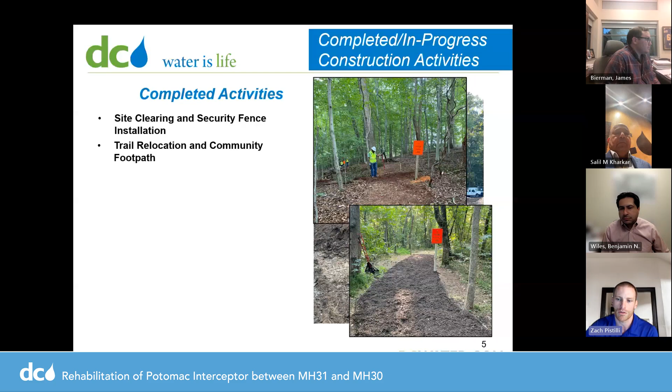Some of the completed activities to get us from the very beginning to where we are now. We had site clearing and security fence back in mid 2022, followed by the trail relocation and the community footpath that services River Park Lane all the way down to the Potomac Heritage Trail. We've had some deep excavations to install these structures. The first is this slip line structure, which is purposefully on top of the Potomac Interceptor, installing a pipeline inside the Potomac Interceptor. That stabilizes that deteriorating pipe and allows future construction to facilitate the rest of our project.

Secondly, the next deep structure was manhole 31.5, representing the far left structure that I showed you in that bird's eye view. You can see this pipe is the Potomac Interceptor. It's conveying flow actively. And we dug under the structure and then built a containment around it.

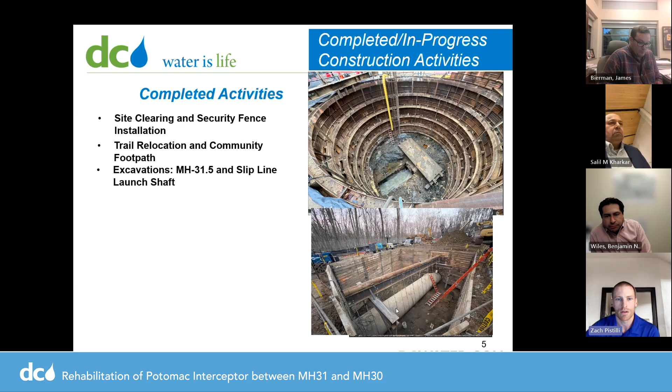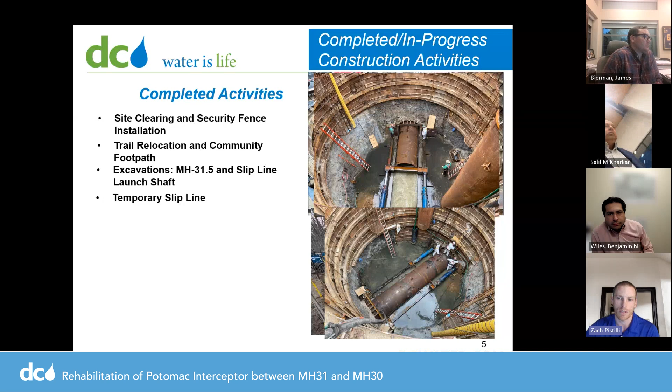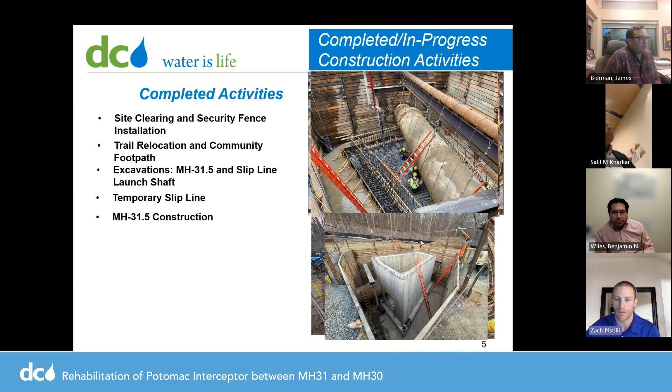This is a photo, two photos showing the actual slip line, really pushing a pipe inside of a deteriorated pipe. So now this pipe, the steel section, is in place, stabilizing that Potomac Interceptor at our project site. Here's the manhole 31.5 construction. Again, that pipe in the top is still conveying the flow, and the bottom is showing the concrete structure.

Manhole 31 is that circular structure that was in the middle of our screen. This shows a lot of the reinforcing steel and the concrete formwork. That structure has been completed as it stands right now. And then additionally, we have the interconnecting piping, the 66-inch that connects manhole 31.5 over to manhole 31. And those efforts are in progress, completed to date.

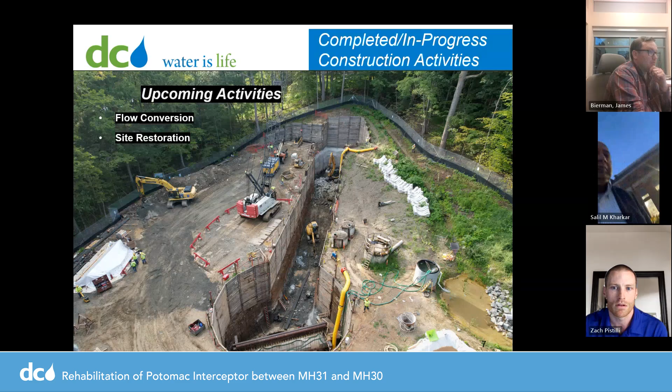Following the completion of that, we'll be converting the flow for about a 2 to 3 week period, and then coming up with backfill and really moving on to site restoration. So that's our planned activities, flow conversion and site restoration up in the future.

So getting back to the planned features of work, when we do our site restoration, it consists of a few different things. The first is going to be our commitment to restore the Potomac Heritage Trail to existing conditions. And that's really both a temporary trail that will be removed, that is routed around our project site. Many of those who use that trail are familiar with it. It is representing the top area up here. The yellow is the existing Potomac Heritage Trail, and that will be placed back into service.

Following that, we'll be restoring that towpath, removing it and regrassing as needed. And that will allow the community to still use that gravel access path that everyone was using prior to the construction site.

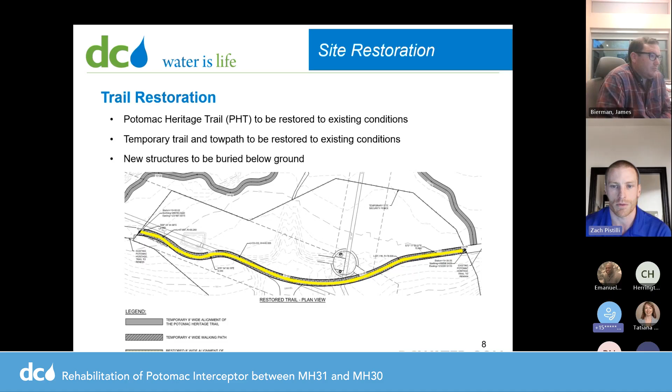Part of the reforestation, we've developed a reforestation plan that is in lockstep with the Fairfax County Public Facilities Manual and also NOVA Parks. So that's really going to consist of 200 plantings with 1.5-inch diameter trees. They're really going to be equally distributed for canopy coverage, and then additional seedlings for additional canopy as they grow up. So everything you see inside of the green here, that's our target area for reforestation.

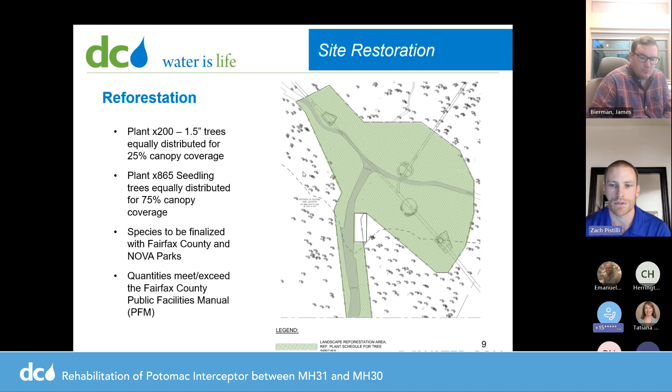Part of the project also, we've committed to do some paving restoration. The paving restoration is going to take place on the private section of River Park Lane, terminating at the entrance to the project site in that gravel path, coming up River Park Lane, bearing right along that dog leg bend, and then out to that cul-de-sac that begins the private road. So that'll be a pavement restoration.

We're still in works about the full depth of pavement repair. I think we have some samplings done, getting some data about what's the total depth of asphalt, but in kind, that's our commitment to replace that paving to the same depth as existing.

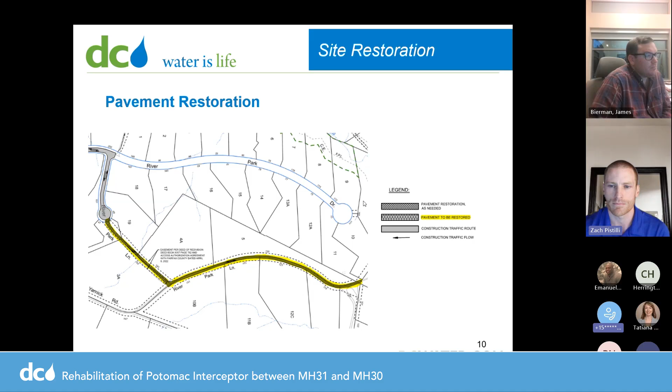So back to our emergency response. I'm sure many are curious in the call. A lot of these slides are really from our presentation we delivered back in February of this year, but I do want to revisit it as we've concluded that emergency response effort.

So luckily for us, we did identify this as a project risk early on in the design phase, and we were able to establish an emergency response plan and also a subcontractor that would be on call in the event that an emergency like this happened.

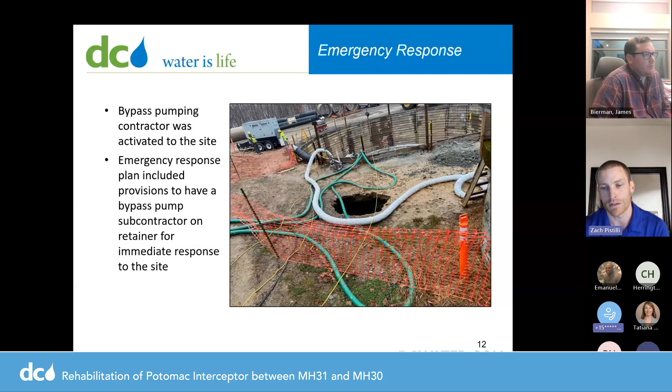So our first step was to call that bypass subcontractor, and they effectively mobilized to the project site within 24 hours, and they dropped 5 bypass pumps and 1 extra in case of maintenance or pump failure for one of the in-duty pumps. Also the discharge piping and suction piping.

This is a photo here of the discharge pipe out to the existing manhole 31. And you'll note that to convey the flow into that manhole 31, we had to remove the lid. And that allowed our piping to discharge through that structure.

While the bypass pumping was conveying the flow for about a 2 to 2.5 month period, we designed and constructed a temporary sewage line from where the bypass pumps were pulling the sewage and then to manhole 31 where it was discharging. And this is a 52-inch steel pipe section. It was about 140 foot in total length.

So we developed that, installed it, and as it stands now, this pipeline is actually conveying the flow between those two structures, and we're off bypass pumping at this point, which is great news. So once we got off bypass pumping, that really allowed us to assess what the impacts to the project and the Potomac Interceptor were as a result of that sinkhole.

So then our efforts shifted into removing that sediment so we can get back to normal flow conditions. So we did about 4 months of heavy, large diameter sewer cleaning, and there's no way to shut off the Potomac Interceptor. So we had large equipment, we had vac trucks, we had a lot of activities to remove this sediment in a deep excavation while the active flow conditions are really happening through and around the site.

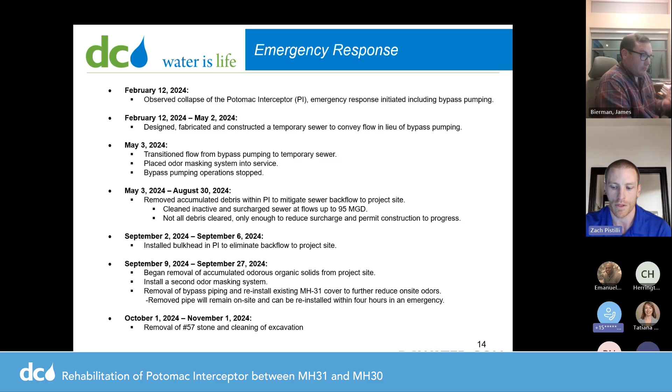And then when we were in the dry and got done the removal of the solids, removal of stone, we were able to put this containment tarp on. The lid is on the manhole now, and tarp over top of it. And I know that as we progress through the winter months here, I expect the odors to diminish even further. I think the cooler temperatures will certainly help us as opposed to the hot summer months.

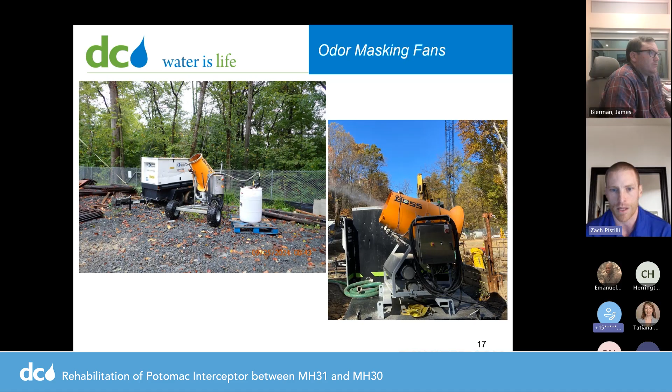We have some odor fans that we've established here, and you can see one is located on the left nearest the Potomac Heritage Trail relocation. That's shooting to our project site. And then the secondary fan is right near manhole 31, trying to tamp down the odors that may escape from that cover and tarp.

So with that, as we've completed our emergency response, we'll be moving on to completion of our final structures, which should take us into the second quarter of 2025. That's not just the completion of the structure itself, but also the converting of flow and the backfilling. And then between the second quarter and third quarter of 2025, we'll be doing our site restoration and reforestation efforts. So with that, I'll pass it back to Emmanuel for some questions.

Thank you, Zach. So, anyone looking at any questions or any information in the chat or any concerns, we can address at this time. Emmanuel, I don't see any questions in the chat.

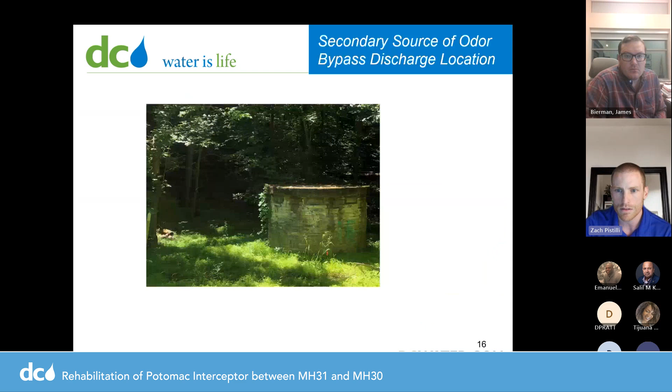So you took a fair amount of dirt off the site and replaced it with new dirt? I don't know where the dirt came from. I'm assuming it's not contaminated though. Correct. Let me jump back here. So before the sinkhole developed and we had a lot of the soil and organic material accumulated, we were at the bottom of our excavation. So to get us back to where we need to build our final pipeline and final structure, we had to re-excavate that material out. So in essence, we just removed the accumulated soil that was as a result of the sinkhole.

Wasn't that one of the reasons why the smell was so bad this summer though? It was from the contaminated soil and that's why you remediated? That's right. So in the sinkhole, and I don't have an accurate photo because there was that 3-foot diameter one I showed, but the sinkhole was really 30-foot wide by 80-foot long. So there was a lot of material that fell either in the Potomac Interceptor and into this excavation as a result of the sinkhole. And then you had organic material building up over top of that soil. So that was really the culprit.

Just curious, I don't want to hog all the time here, but the 1.5-inch trees you're going to plant, I'm assuming those have sleeves around them, so they're not just deer fodder, right? Yeah, I think that's the case. Yep. And we're still working, I think, on species with NOVA Parks about what trees are best for this area. But yes, they will be protected.

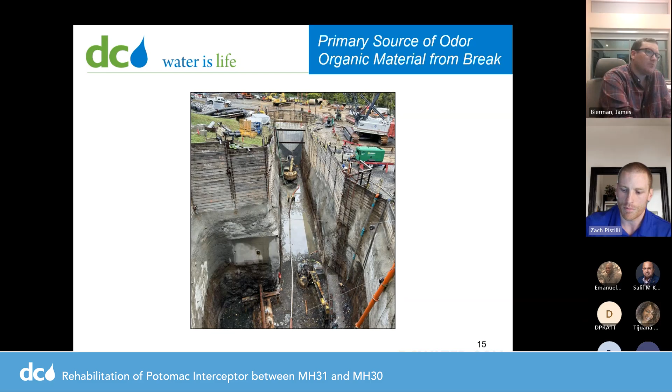So what caused the sinkhole? The pipe failed? Yeah, that's correct. Yeah, the pipe failed. Pull back. Yeah, directly in on this red area. And not to get too detailed, but this is a 54-inch existing pipe, and you can see this is a slope of 7%. Doesn't sound like a lot, but in wastewater conveyance, that's a very heavy slope. You usually want to have that very close to, certainly under 1%.

So that resulted in a lot of increased velocity of this flow in here, so you have an erosion problem because there's high velocity flows in a gravity line, but also there was corrosion because it developed a lot of off-gassing as a result of that high velocity. So that developed really a weak point at the top of the pipe, the crown of the pipe, and over time, it just happened to decay to a point where a sinkhole developed and dirt would fall into the pipe.

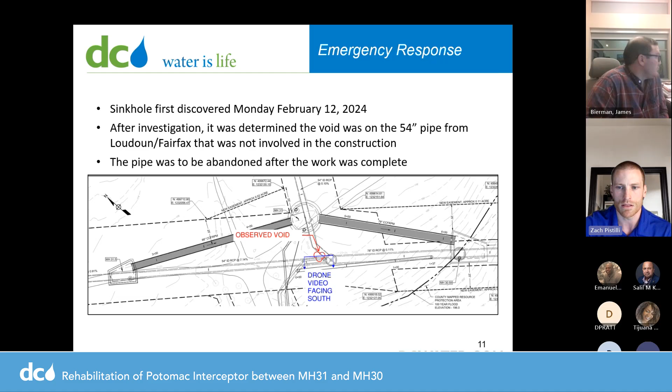So what's the life expectancy of the new pipes? The new pipes, they're fiberglass, spiral wound fiberglass. You can kind of see they're a little bit different looking.

Sorry, jumping back and forth.

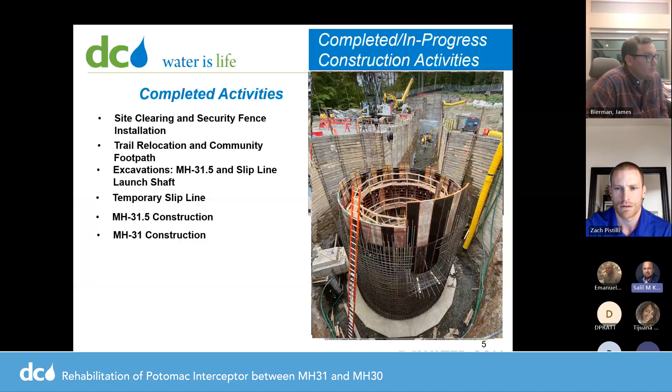So Zach, to answer the question, I think it's 75 to 100 years, I believe, for the pipe. Yeah, I think that's 75 years, Salil, for this specific pipe. It's very resistant to corrosion and off-gassing. Plus the design of the system, sorry for interrupting. The design of the system is with a drop so that it does not have the same velocities. Might want to explain that so we don't repeat the same problem. Yeah.

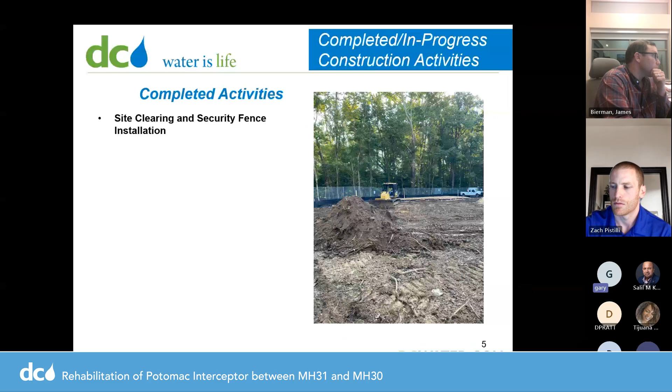And at what point will there be like no odor down there when you walk through? So I think we're successful in deterring some of the odors. I do understand that there was a significant amount of odor for a period of time that we were trying our best to get that tamped down as quick as possible. But really, the cleaning was driving our project, and there wasn't quite a known deliverable for that. We just were pulling out little bit by little bit, and it did drag on.

But I would think as we progressed through the flow conversion, we built our final structure through these winter months. I would expect there to be even less than there is now. And I know we've certainly made some strides. I feel like we were getting a fair bit of odor complaints near the project site and even a little bit downstream. But from my understanding, I haven't seen anything come through in about 3 to 4 weeks. I'm hopeful that our strategies have been somewhat effective in lowering those.

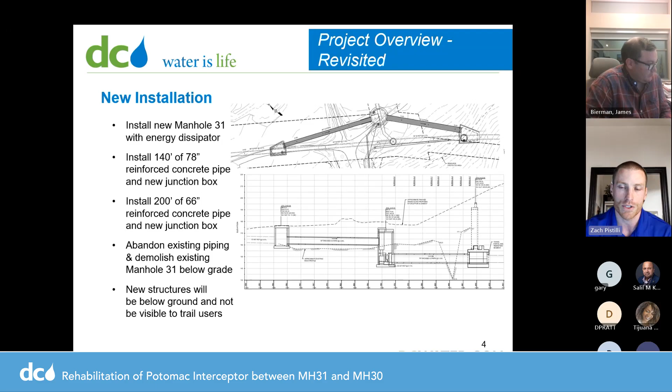Now, at the end of our project, looking well beyond quarter 3 of 2025, the new structures will be connected to the DC Water odor control facility. So following the completion of our construction, I think it'll be much improved.

So did the pipe fail on its own or because of you guys working near it, or what happened there? We think it was just decaying and corroding over time. So our plan, we did not park any equipment on top of it. We weren't surcharging it, and we weren't excavating on and around that section of pipe. You can see where the pipe failed over here is a little bit far away. It's about 40, 50 foot away from where we're actually excavating for our structures. So we think it was just over time.

In reality, it's kind of a good thing it failed as the project was ongoing. That allowed us to respond very quickly. If it happened 3 years ago, it might have been a little bit different story with how quickly the response could have been. Zach, the whole impetus for the project is because we were concerned about the high velocities and corrosion in that pipe to begin with. Right. But have you done a further study as to the condition of the rest of the existing pipe? I mean, we're gonna have the same problem in 5 years somewhere else?

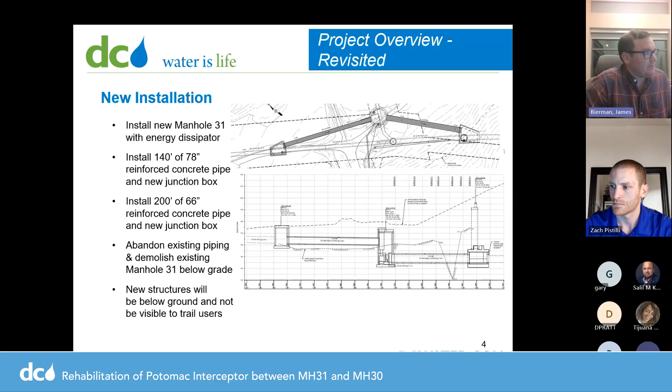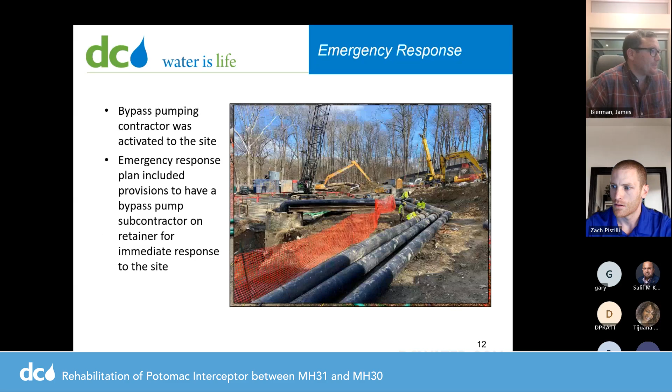And what is the actual, again, you'd have to go back to the slide. I think you said third quarter of 2025 that the new pipe should be there. So let's be honest, that means the end of 2025. Is that right? I'm sorry, I just need you to go back to that slide. Yep, I'm getting there. Sorry. But this is the same slide that was shown the last time we talked in February. Yeah, how does the sinkhole affect that estimated project schedule? Can we still count on this thing basically being done by third quarter of 2025, or do we need to be thinking further out?

Obviously the long pole in the tent driving this project delay, number one, is we had to construct a temporary pipe. We had to do that very quickly under bypass pumping conditions, and that was 2 to 3 months for that work. Then we had to do the cleaning of the pipe, with up to 95 million gallons of flow, in a deep excavation. That took about 4 months, and once that flow line settled, that allowed us to do our cleanup of our excavation.

So you said that you haven't gotten complaints in 3 to 4 weeks about odor, but it's clear that people still are smelling odors. So why are they still smelling odors? And will ultimately the only antidote to the odor be everything being good and buried and done? Is that right? Or is there some other reason why they're still smelling odors? Yeah, I think people just want to get back to a sense of normalcy. So I'm trying to level set when that'll be and how.

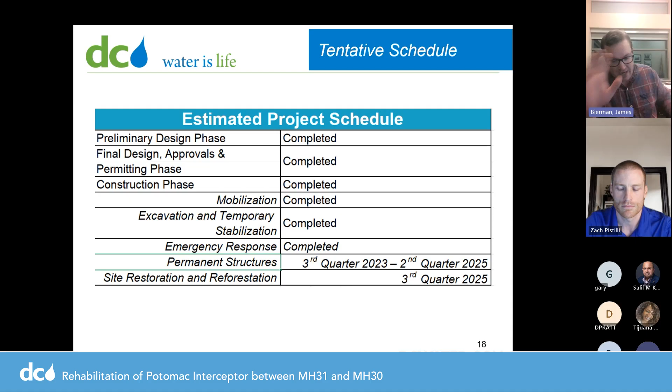But you know, when people are asking the exact types of questions you would expect to be asked, you need to have somebody here who's ready to answer those questions. Period. It's just not acceptable to not. Now, again, I'm sorry, ma'am, when I said 9 months, I meant since the spill. I recognize that this project's been going on for 4 years, and so I apologize for saying it that way. But you need to hire someone who knows this stuff if you don't know it, and frankly, you should know it.